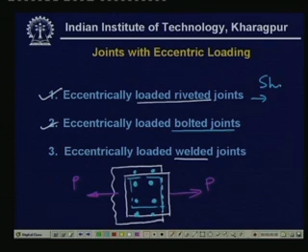Similarly, we have the eccentrically loaded bolted joints. Now, rivet joints mainly take load in shear, the bolted joints take primarily load in tension. You may remember we talked of the effect of pre-stress. There we had to initially tense the bolt. By initial tensioning, we relieve the bolt of the final loading if the loading is tension type, but primarily we always talk of the tensile load in a bolted joints.

When we come to the welded joints, there may be two possibilities. There are two kinds of welded joints. One is butt weld, which can take tensile load as well as shear load. The other is the fillet joint, which can take load, or which is designed to carry load only in shear. That is, it is not mandatory that all the loads will be shear type, but we carry the design procedure assuming that the entire load is shear and acting on the throat cross sectional area.

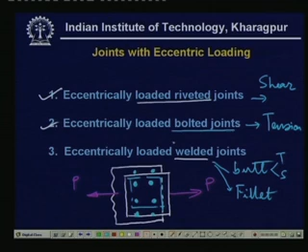This must be very clear from the last lecture. In this lecture we are going to study something of these kinds of joints, that is eccentrically loaded riveted joint, eccentrically loaded bolted joints and eccentrically loaded welded joints.

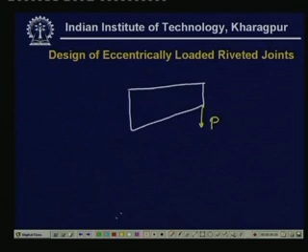Let us now start the discussion of eccentrically loaded riveted joints. If we have a rivet joint of this shape, let us say this is the plate which is acted on by a force P over here, and there are few rivets. Let us say there are some rivets here, and it is connected to another plate. Now, clearly you see the cross section, that is the load does not pass through the center of gravity of the riveted joints.

And what is meant by the center of gravity of the riveted joints? Now, if the cross sectional areas are A1, A2, A3, AI, where I equals 1, 2, 3 and 4, then the center of gravity of these joints is given as x bar, which is equal to A1 x1, the x coordinate of the first rivet, plus A2 x2 etc., plus A3 x3 plus A4 x4, all divided by the total area A1 plus A2 plus A3 plus A4.

So, this is the area of cross sections giving the geometric center of the rivets. Similarly, we have y bar, which is equal to summation AI yI bar. These x1 bar, x2 bar etc. are nothing but the x coordinates of the ith rivet.

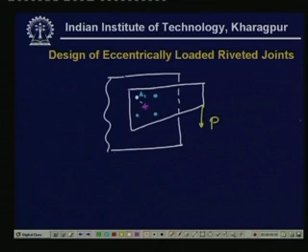Let us come one by one. First, there will be the shear force acting. There are now 4 such rivets. So, therefore, each rivet will carry a shear force P divided by total number of rivets, which is equal to 4. Therefore, this is P by 4.

And then we have to calculate the bending, the force that is acting because of the tendency of this entire plate to rotate about the center of gravity. What will be that force? That is difficult to find out analytically, so there is no exact solution possible, but we make some assumptions. We assume that the riveted joints rotate about this point, and the load acting is proportional to distance from this CG.

Now, let us look at it. If we replace this load, now it is clear from statics that within one static body we can shift this load from one point to the other, provided we add some amount of couple or some amount of moment about the next new point. Let us see what does it mean.

If we remove this load, now what we have done essentially is to take the load here, so this is the load, but now we have to add again the moment.

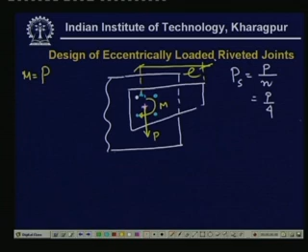And what is the moment? The moment will be equal to, we have to add the moment is definitely clockwise, and this moment M will be equal to P times the length of the arm, and this is the distance. If the eccentricity is E, then this is nothing but M is equal to P times E. So, this moment has to be added.

Now, the internal forces within the rivets will be such that they should balance not only this external force P, but also this external moment M. As we have discussed, because of the direct load P, each of the rivet will experience some shear load, which is equal to P divided by N, and for 4 such rivets here we have P by 4.

Now, this is true for all the rivets. Now, we have to calculate the effect of the M.

Now, here we make an assumption, that is, if you look at this riveted joint more carefully, if you enlarge it, so this is this part which I have enlarged. Then the center of gravity is of course here.

Then we make the assumption that each one, the load carried will be proportional to the distance from the center. That is, let us say this force is F2, and this force is F1, which is perpendicular to this line joining the rivet and the center of gravity, and the magnitude F1 is proportional to this distance.

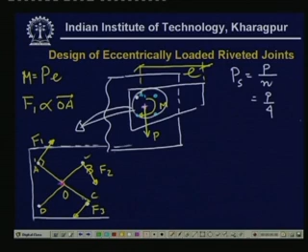Similarly, on C we have F3 which is proportional to OC and direction perpendicular to the line joining OC. Similarly, on D, F4, the magnitude is proportional to OD and the direction is perpendicular to OD.

Now, here we make these assumptions, and with this assumption we can calculate further. What we see, if we denote these by vectors R1, R2, R3 and R4, then we have the following relationship: F1 times R1, the couple about point O, plus F2 times R2 plus F3 times R3 plus F4 times R4, this plus M will be equal to 0.

Now, this is the balance of the moment about the point O. Now, we have made the assumption that F1 is proportional to R1, F2 is proportional to R2. Let us denote the proportionality constant to be K. So, Fi is equal to K times Ri, where K is a constant. Now, if you substitute this into these equations, what you get is K times R1 square plus R2 square plus R3 square plus R4 square plus M equal to 0.

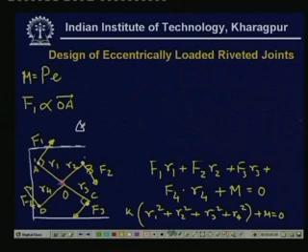What you have then is Fi equal to K, which is equal to minus M divided by summation Ri square, I is 1 to 4, times Ri, and this is equal to minus Pe Ri divided by summation Ri square. So this is now the force acting on the ith rivet. Now let us see what is the resultant of this force.

Remember, we have two forces. One is the force acting because of the direct shear, and each rivet is carrying the same force, and there will be another force due to the turning action. So we will have to look into the resultant of these forces. The resultant will be different for different cases. We study one or two cases here.

For the first case, let us say on A, that is the first rivet, we have direct shear force which is equal to P by 4, and we have another force perpendicular to this distance, which is F1. Now we should get the resultant force.

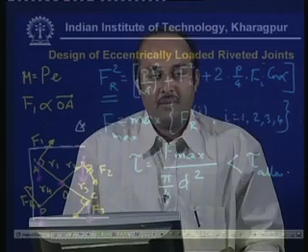With this assumption we make these calculations, we find out the maximum force in such rivet assembly, and then with the maximum force we calculate the maximum shear stress taken by this bolt, and hence we calculate the corresponding diameter, that is, we design the joint. So this is the design procedure for eccentrically loaded riveted joints.

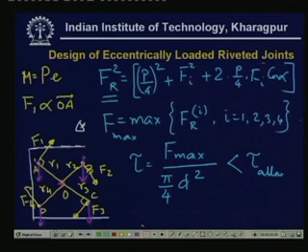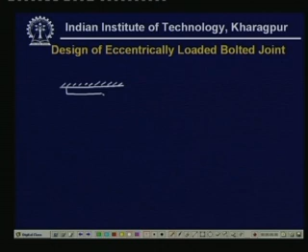Now let us go to the design of eccentrically loaded bolted joint. Here we have two distinct cases. First let us take the example. Consider this kind of bracket. There are bolts here, so if you look from this side, top view, you will see...

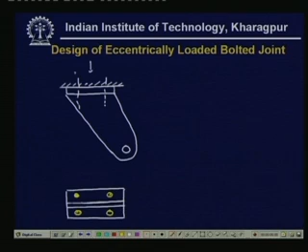Now these are the bolts. Let us say cross section 1, section 2. So there are 4 such bolts, 1 and 2, and the load is acting here.

There is a load P acting. Now, what will be the effect of P? The P will introduce tension in the bolted assembly. Each bolt will carry some tension, but the tension will not be uniform, because there is a distinct tendency for this bracket to rotate about this point, let us say point A. So, there is a tendency that it will rotate about this point because of this load. Therefore, the tension in the bolts will be unequal.

Now, how to calculate the tensile load in the member. We make the static equilibrium, let us say each of the bolts carries a load F1 and F2. If you write down the static equilibrium equations, there are 2 such bolts, 1 and 2, so 2F1 plus 2F2 will be equal to P, and that is the only static equilibrium equation we have for this case. This is a statically indeterminate problem, because we have 2 unknowns and only 1 equation.

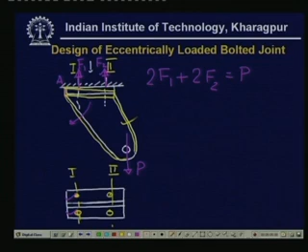This bracket is a rigid body. So, when it rotates, suppose it rotates, then because of rotation it will come to some position. So, because it has rotated, this was the original position and this is the final position. Now, it has rotated, therefore, there is a small deflection of these 2 bolts.

There will be some elongation of this bolt. If you draw it elaborately, then what you see here, this was the initial line, and after that it has rotated here. Now, if you denote this length from this point to that point by L1 and from here to there by L2, then this is L1, this is point A and point B. So, this is L1 and this one is L2.

Now, the delta, that is delta 1, the deflection of this, is proportional to this length L1. That is clearly visible because this is a rigid plate, so this angle is constant. So, tangent of this angle will be equal to delta 1 divided by this length L1, and the tangent of this angle will be equal to delta 2, the deflection of this bolt, divided by the entire length L2. So, therefore, delta 1 is proportional to L1 and delta 2 is proportional to L2.

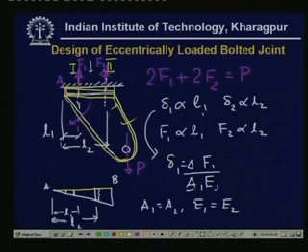So, this will be equal to stress, which is equal to F1 divided by A1 and E1. Now, if you consider A and E are the same, that is A1 equal to A2 and E1 equal to E2, then F1 is proportional to delta 1, and delta 1 is proportional to L1. So, therefore, F1 is proportional to L1 and F2 is proportional to L2. That comes from very simple calculations.

Now, we can use these considerations, that F1 is proportional to L1. If you consider the proportionality constant to be k, then F1 is k times L1, and F2 is k times L2. So, in this case you can find out F. Thus we arrive at the different loads in the bolted joints.

So, this is one example where the load is acting such that there is always tension in the bolt. Now, we come to the second example where the load is acting such that both tension as well as shear force will be developed. Let us see.

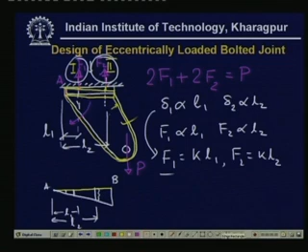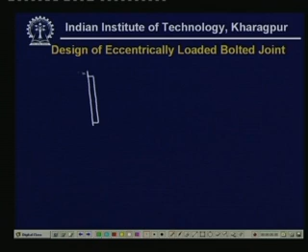Let us come to the next example. Here we have, now here, and we have, let us say, again some kind of arrangement. If you look from this side, then we have this bolt.

So there are these 4 bolts, and the load is acting over here. Therefore, the direct effect of P will be to introduce some shear force, so each of these bolts will carry some shear force.

Now the shear force will be equal to P shear, which will be equal to P divided by 4, because there are 4 such bolts.

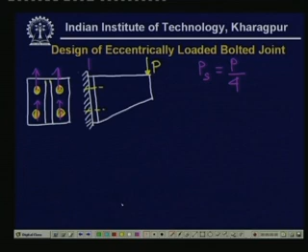Now, what is the effect of this eccentricity? Let us say there is a distance E from this plane to that of the application of P. Because of this eccentricity, it will try to rotate about this point. If this is A and B, there is a tendency that it will rotate about this point.

Because of this tendency of rotation, there will be elongations, that is enormous tensile force will be developed in this bolt. Again, if you consider the rigidity of this member, if it tilts this way - this tilting is very much exaggerated, but the point is that rigid body statics is not enough, and we will have to consider the deflections, the elongations of the bolt, using the strength of material approach.

So therefore we make this assumption of rigid body rotation. This bracket is relatively rigid compared to the bolt, so the bolt gets extended, whereas the rigid body only gets rotated.

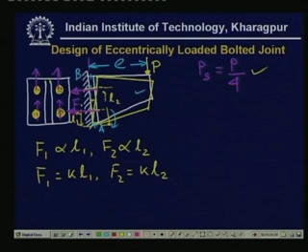Let us use the moment equilibrium equations now. If you take the moment about this point, what you get is F1 and F2 - let us consider this direction of force is F1 here, and F2 - then we have F1 times L1, the moment about point A, F1 L1 plus F1 times L1, because there are two such bolts.

So twice F1 L1 plus F2 times L2, again twice of that. This is equal to the external moment, which is equal to P times E.

Now if you use this relationship, that F1 and F2 are proportional to L1 and L2 respectively, then what you get from this equation is twice K, L1 square plus L2 square, will be equal to P times E. From this you calculate K, which is equal to PE divided by twice L1 square plus L2 square.

Once we have calculated K, then we have calculated F1, because F1 will be equal to K times L1. So this is equal to PE L1 divided by twice L1 square plus L2 square, and F2 will be equal, similarly, to PE L2 divided by twice L1 square plus L2 square.

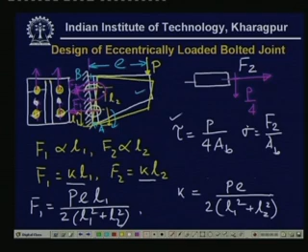This should take off the shear load as much as possible. So if you increase the number of bolts, the shear load may be decreased. The shear load is reduced as far as possible, but if further reduction is not possible, then we will have to consider the effect of shear stress as well as normal stress, and then calculate the von Mises stress.

When we have both stresses, we can calculate the von Mises stress, which is equal to square root of sigma square plus thrice tau square. This is one failure criteria, where the material fails if this is greater than sigma allowable.

Another failure criteria is the maximum shear stress, tau max, which will be equal to square root of sigma by 2 square plus tau square, and this must be checked. So these are the two criteria by which ductile material will fail.

If it is made of brittle material, which seldom happens, we will have to consider the maximum principal stress, given by the well-known formula: sigma by 2 plus square root of sigma by 2 square plus tau square, and if the material is of brittle nature, this should be less than allowable.

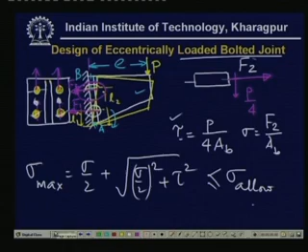Now we come to the third case, where we have the eccentrically loaded welded joint. There are again a few examples, we take them one by one. Let us consider the case where a plate is welded to a structure.

Now the welding can be done in various ways. The welding may be on this side, that is, it may be a transverse fillet welding. There are two kinds of welding: one is butt welding and another is fillet welding. Normally in this case we use fillet welding. There may again be two types of fillet welding, one is transverse fillet and another is longitudinal or parallel fillet. Let us say that here this is a parallel fillet.

So we have the fillet joints here, fillet joints over here, and the load is now an eccentric loading in these directions. Remember, in earlier classes we studied the design of this welded joint, where the load was along these directions, but now instead we have load in other directions.

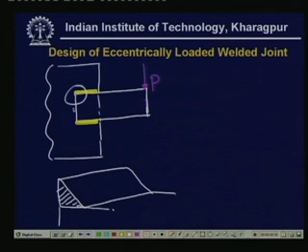Now, if you look a little bit closely, the fillet weld looks like this. This is the plate, and this is the welded part. This is the fillet, and the critical section is the section of the throat, that is this section. So, this is the critical section, and the failure may take place in this section itself.

Now, when we consider the eccentrically loaded joint, in addition to the shear force, there may be two cases, two kinds of stresses: the direct shear force, direct shear stress. What is the direct shear stress? The direct shear stress value, tau, will be equal to P divided by twice the area of the throat, because there are two such welds.

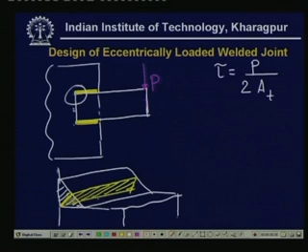And what is the area of the throat? If this leg size is h, normally the fillets will have equal dimensions, and this is a 45-degree angle. So, therefore, the throat area AT will be equal to throat times the length. If these two lengths are equal, then area will be equal to T times L, and this is equal to H by root 2 times L. Therefore, the shear stress will be equal to P divided by twice H by root 2 times L. So, this is the direct shear force acting on this joint.

But what will be the effect of eccentricity? We see that eccentricity will try to rotate this entire plate about some axis, and what is that axis? This axis is nothing but the center of gravity, that is the geometric center of this welding. There are two welds, and we can define always one center here, which is the geometric center.

How do we define this geometric center? It is again based on the throat area. What we do here is depict the entire welding in terms of the throat area. So, here the length is L, and we look at this in this plane. This is the throat area plane. Now, this is T, similarly this is T, and this is L, etc.

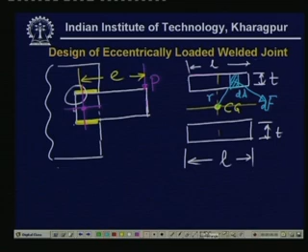Similarly, a similar assumption is made here: that this force is proportional to, let us say dF, the small force acting over the small area dA, is proportional to the distance r. So, therefore, we can write that dF, the magnitude, is proportional to r times the proportionality constant, and the area of cross section. In a sense, the stress is proportional to r, and the force will also depend on the area of cross section. So, this is the total force acting on this infinitesimal area dA.

So, therefore, the net torque T will be equal to dt, which is equal to r times dF. The direction is again important; it is such that it tries to rotate. So, this direction of the force dF is perpendicular to the line, the vector joining the CG to that infinitesimal area.

So therefore the total torque will be equal to r times dF. This is the torque over this infinitesimal area, hence the total torque will be equal to the integral of this, and that could be written as k r square times dA, over the entire area. Now, if you calculate this, this will be equal to the external torque, Pe. From this we calculate K.

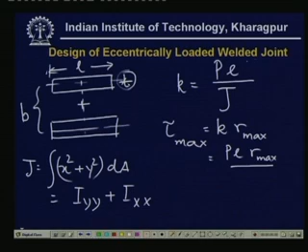Now, whatever relationship you have, what you have to do is just take this data and multiply by the throat length, which is equal to h by root 2. h is the leg or the height of the fillet weld. If you do that, you get J, then tau max will be equal to Pe R max divided by J.

What you now have is tau max, the direction of the force. You cannot add stresses vectorially, but you can add forces vectorially. So over a small cross sectional area, you calculate dF, the force due to the load, the direct shear stress, and the shear stress due to torsion, and then you add them vectorially and find out the maximum shear stress. Using the maximum shear stress theory you can find out the different design parameters.

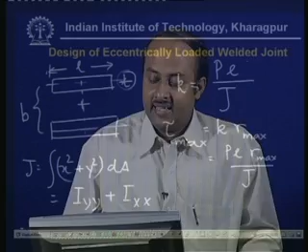So this is roughly the way to calculate welded joints when there is eccentric loading. Let us recapitulate what we have learned: how to calculate the strength of joints with eccentric loading for riveted joints, where mainly shear stresses exist. In bolted joints, there may be cases where only tensile force appears, or cases where both shear force and tensile force appear. In eccentrically loaded welded joints, there is a case where shear stress appears. Sometimes we can have tensile force, but we are not going to discuss them here. So this is all about eccentrically loaded joints. Thank you very much.

Let us begin the lectures on machine design part 1. This is lecture number 26, and the topic is design of joints with variable loading. In the last few lectures, we have learned how to design the joint for strength under various static loadings. In the last class, we learned how to design the joint for eccentric loading, and in this class we are going to study variable loading. Variable loading is very important for any machine components. In structural joints, normally the loading is static, but in machine components there will invariably be some movable parts, and because of this movement there will be forces which are normally fluctuating in nature. So these are to be taken care of while designing it.